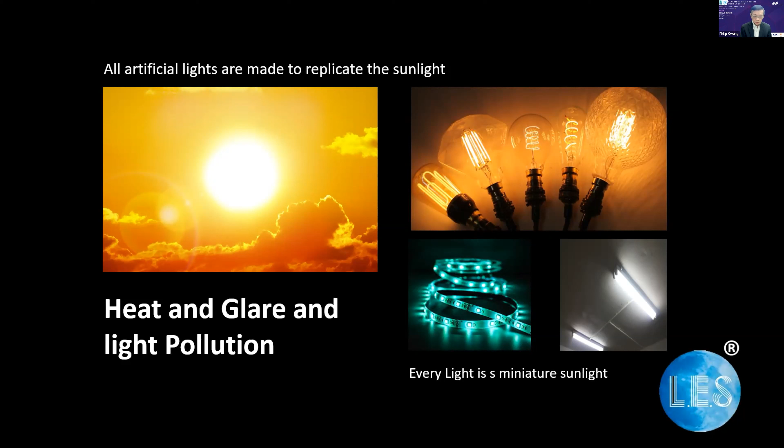We talk about it as a technology, and since we are using mostly artificial light produced according to the characteristic of the sun, why not have something produced according to the characteristic of the moon? This is the reason we founded LES, a light emitting surface. The surface is akin to the surface of the moon. We reflect light,

and we call our lighting technology the moon, representing our light. The heart of the technology is that moonlight doesn't produce heat or glare, because you can see moonlight from a further distance, and therefore it doesn't cause any light pollution. I'm saying this not because we think moonlight or LES will eventually replace LEDs, but we think that sunlight artificial lighting and moonlight artificial lighting could harmonize to build a better environment for ourselves.

LES is an award-winning technology. It was named the world's first printed lighting technology, and since then we have been internationally patented in China, Japan, Taiwan, Singapore, and of course Europe. The trademark has also been registered. On the day we launched LES, we had immediate recognition from Philippe Starck, the world's most renowned interior decorator, and with his blessing, we were able to put out LES as a pilot project in South Beach.

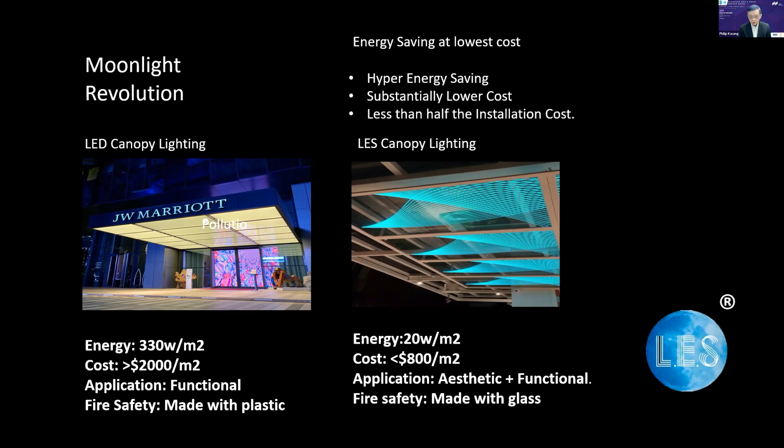Throwback to today, the same LES could be designed with high aesthetic. In fact, LES can be produced in all kinds of patterns, any pattern of your preference, so it can achieve the aesthetic typically associated with high architectural value. In terms of fire safety, more and more LEDs are being used, but more and more LEDs are plastic, and plastic is typically not well accepted by our fire authority. Whereas LES is fully encapsulated between two pieces of glass, which immediately places a lot of confidence in terms of fire safety.

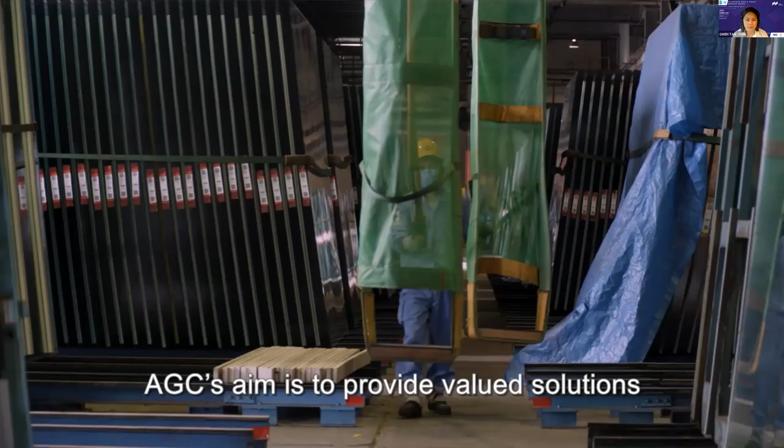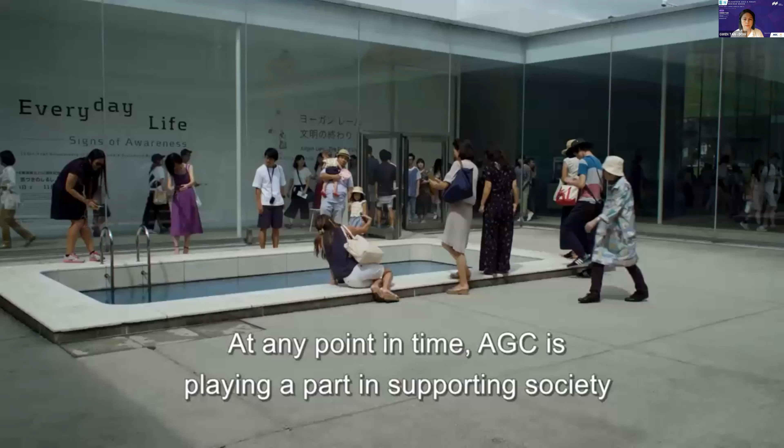AGC constantly strives to provide customers with high-value solutions and functional products. We offer a wide range of materials such as glass, chemicals, electronics, and ceramics, and have a strong presence in many countries around the world. AGC's aim is to provide valued solutions in high-quality materials to people around the world. Our fluoropolymer resins for coatings are used in many places around the world. Our fluorine film is used in Allianz Arena in Munich, Germany, and in many stadiums and architectural constructions worldwide. AGC's display glass is used in smartphones around the world; our glass plays an essential role in presenting clear images. At any point in time, AGC is playing a part in supporting society somewhere in the world through the provision of unique materials and solutions.

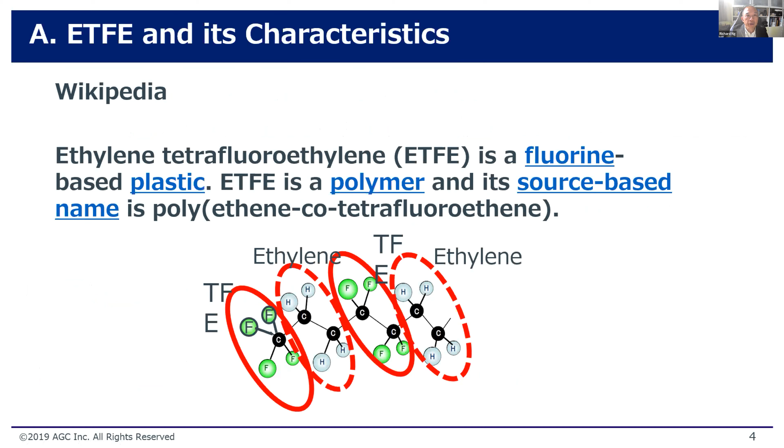This is something I lifted from Wikipedia in case anyone is interested in the scientific description of ETFE. It's just ethylene tetrafluoroethylene, and like what the earlier video demonstrated, it is a fluorine-based plastic, very well developed and researched by AGC.

I will share a video. This is lifted from YouTube. It is a fantastic source material for ETFE. This is one of the many videos that I found that perfectly describes and depicts what ETFE can do and the advantages of which.

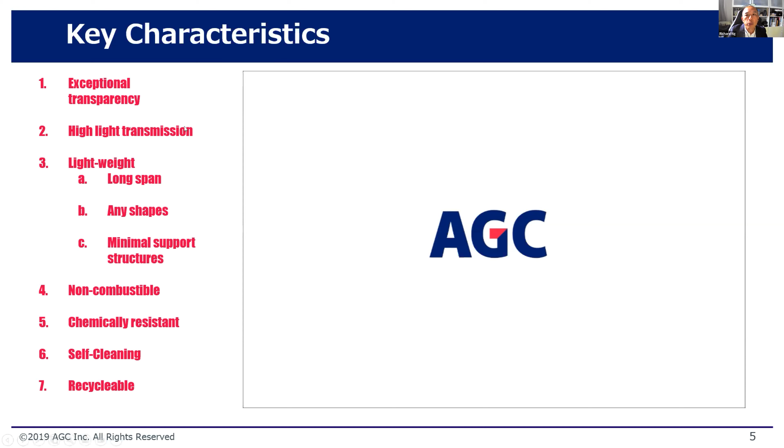That's 7. You can also introduce solar shading on ETFE. So if you have a specific U or G value that you want to achieve, that can be customized with the use of prints.

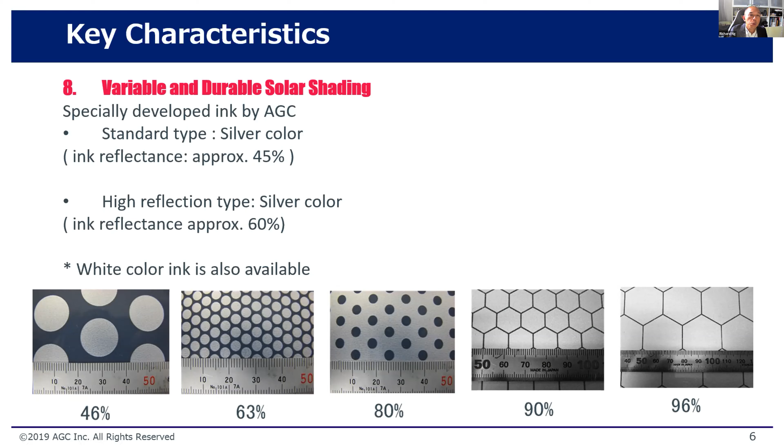This is unique and very important research that AGC has undertaken, and they have moved on since 2013 to ensure that the reflectance of solar or UV improves with every new development that they have done.

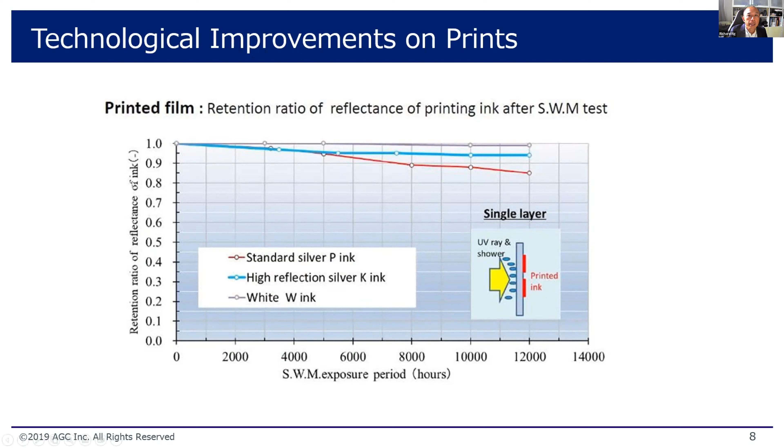Number 9, another characteristic is the superior weatherability. The product was first used, I think, about 35 years ago - I apologize, the number here says 27 years, it should be amended to 35 years already. So the optical properties and mechanical properties, by and large, stay about the same. It's a highly durable product.

And also the R&D undertaken by AGC is to improve on its haze and clarity. That is something under R&D right now. Probably by end of the year, as I was told, this product will contain low haze and high clarity to a very large extent when they push out the product.

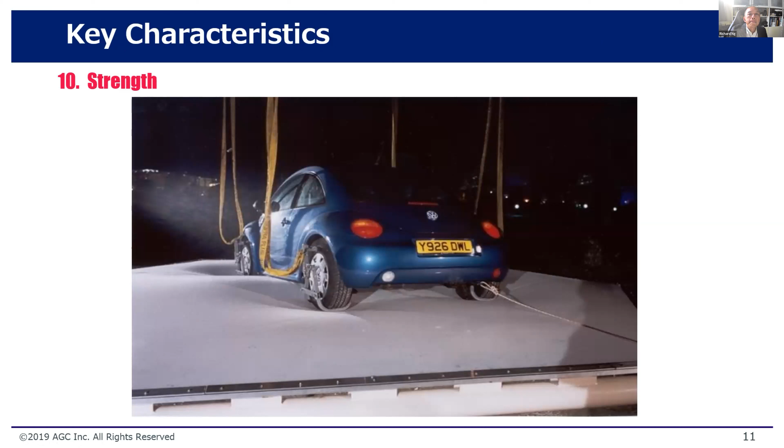And finally, one of the key characteristics is the strength of the ETFE. It can take on the weight of a car in its form.

So, critical considerations in ETFE application: importantly, other than making sure that the loads are properly taken into account, you also want to think about the seismic loads, the surrounding buildings, and others. Glass has been a dominant product for roofing and facade since it was invented, but with it comes various disadvantages.

For example, in volcanic regions or where there's high earthquake activity, typically when buildings collapse, there'll be a lot of debris. So in the use of ETFE, you're talking about relatively less steel structures compared to using glass, and you don't have glass shattering, unlike glass itself.

Also for surrounding buildings, if you're using glass as a roof for commercial complexes, anything that falls from the sky, be it steel pipes or heavy objects, immediately breaks the glass roof below. With ETFE, you just puncture through the plastic without causing any shattering. And finally, fire safety, chemical spills, and maintenance are other reasons to consider ETFE instead of traditional glass.

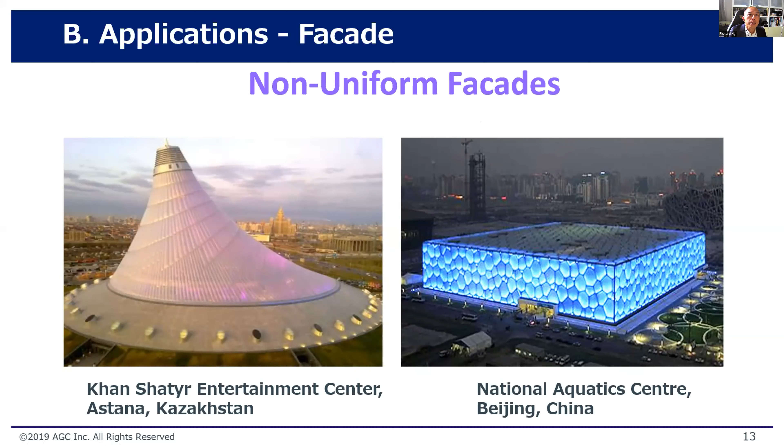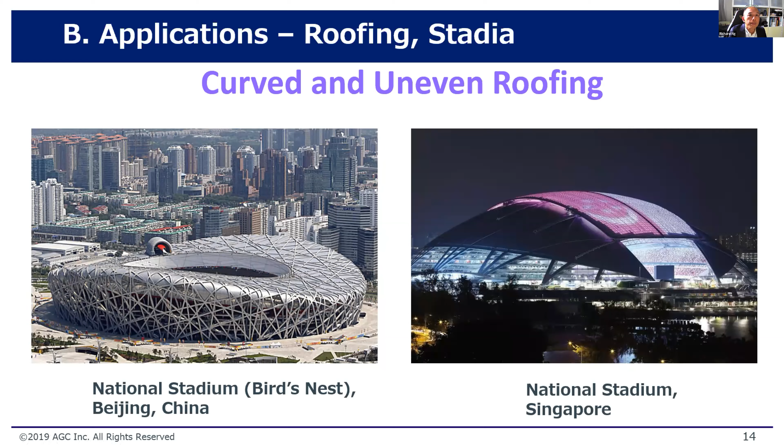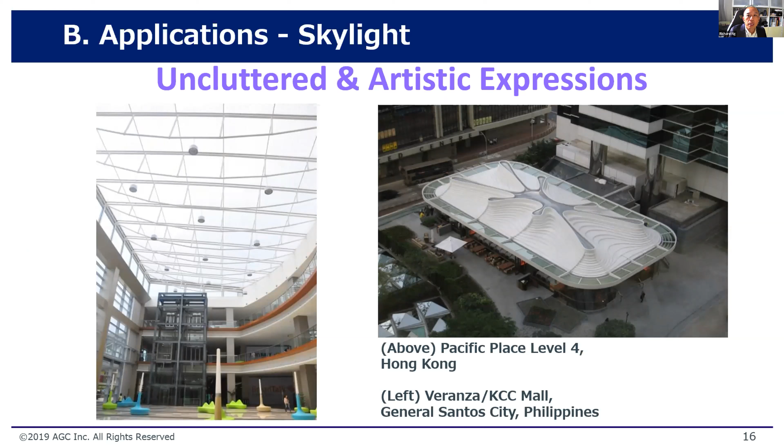Skylight, use of ETFE in skylights. This is in a Philippines mall. The one on the right is in Hong Kong for artistic expressions.

And the use of LED with ETFE gives you a completely different look at night with the use of lights. In fact, you can probably incorporate this - AGC can probably work with Philips in making sure that LEDs can also be incorporated into this product.

Thank you. So I'll move on to the two types of ETFE installation available in the market. One is the single layer tension system.

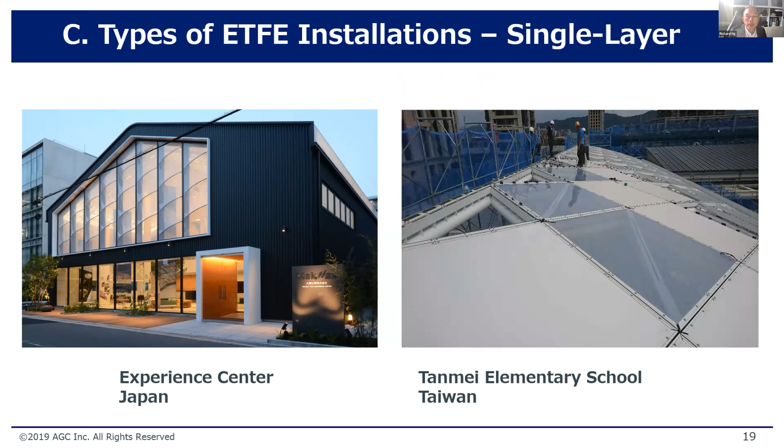This is a project in Japan - you'll notice on the roof those are entirely single layer ETFE. Facade using single layer as well on the left, and also for a school as a canopy on the right, which is a combination of transparent ETFE and opaque PTFE.

And the second type of ETFE installation is the cushion system - essentially two pieces of ETFE inflated with air in between. So the entire system will consist of an air pump or air inflation unit.

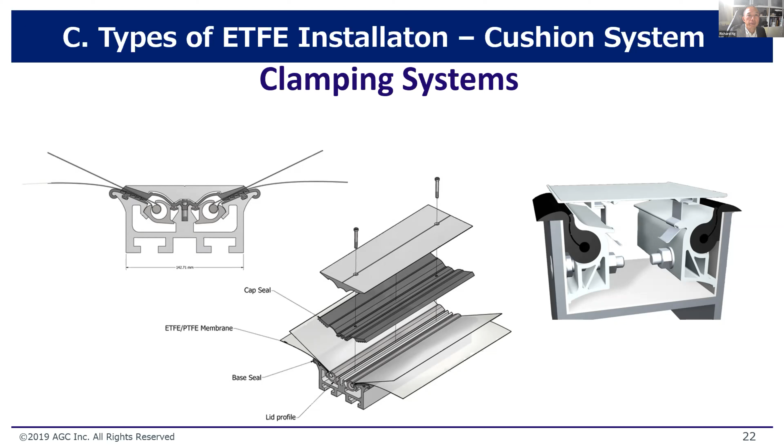Increasingly, you will notice that ETFE has been considered the go-to product, particularly for roofing, simply because of the nature of the product and how flexible it can be in offering architects and designers flexibility and non-restriction as far as imagination can go.

So I think that is fundamentally, or rather essentially, the end of my presentation. I hope I kept within the time.

Yes, you did, Richard. Thank you for the sharing. I love especially all the project references—they all look so fantastic and aesthetically very nice. So Richard, we do have a question from our participants.

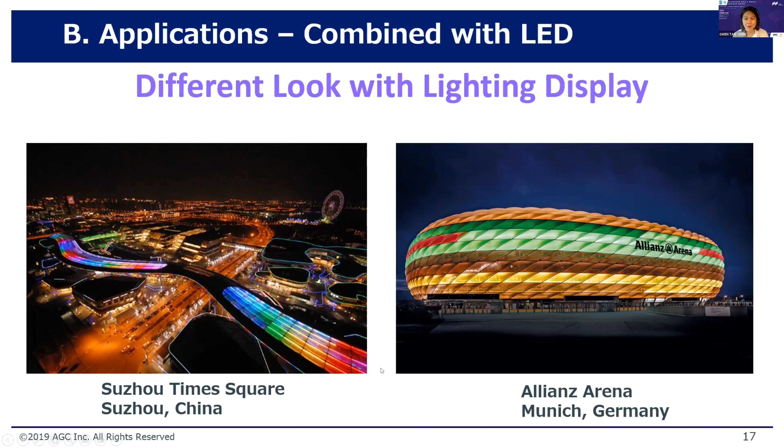Okay, thank you Richard, that's a very nice presentation. Do we have any more questions on the floor? Let me just check again... Yeah, I think that's the only question that we have. But we do encourage participants to keep putting more questions in the chat box, because we have another Q&A session towards the end. For now, let's move on to the next session.

Next up, let's hear from Lina Lu from RSP Singapore and Vance from Arup Singapore. A quick introduction: Lina has more than 30 years of architectural project experience, and her portfolio ranges from residential, education, infrastructure, sports and recreation, hospitality, offices, and retail projects. Vance is an associate with Arup Singapore Private Limited, and has a deep understanding of design, production, and site challenges from his early days of industry experience. Now let me pass the time to both Lina and Vance to discuss the topic of CapitaSpring: challenges in high-rise facade design.

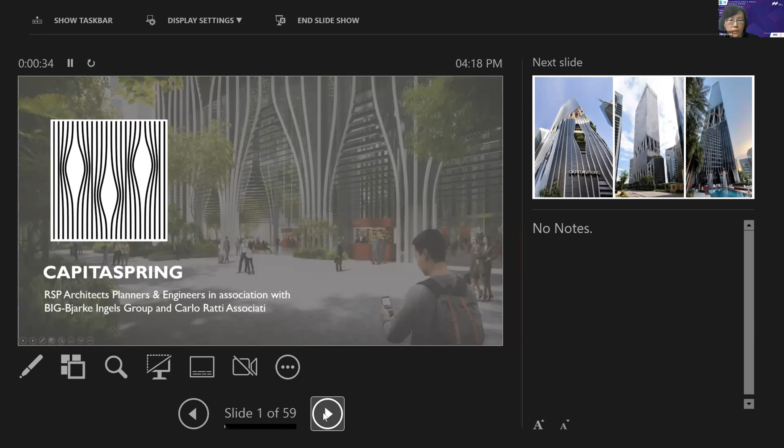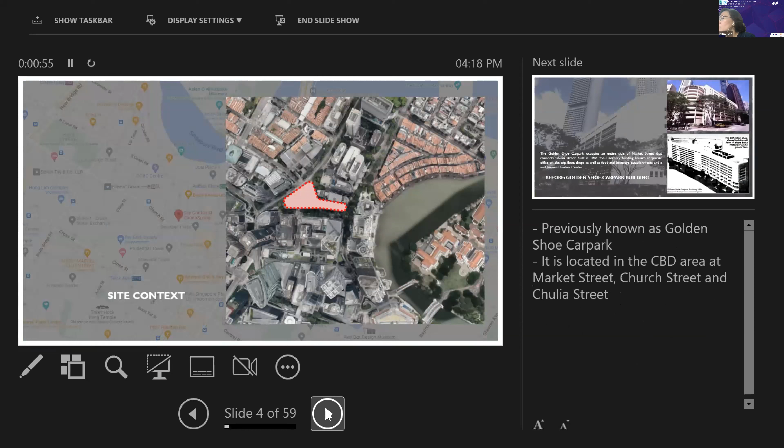So CapitaSpring is designed by BIG in association with Carlo Ratti. BIG is a company based in Copenhagen and New York. As you can see, this is a newly completed office tower in the Singapore CBD area, located within easy walking distance of Raffles Place MRT and Telok Ayer MRT, and near the Singapore River. The site is very close to the heart of the Raffles Place MRT area.

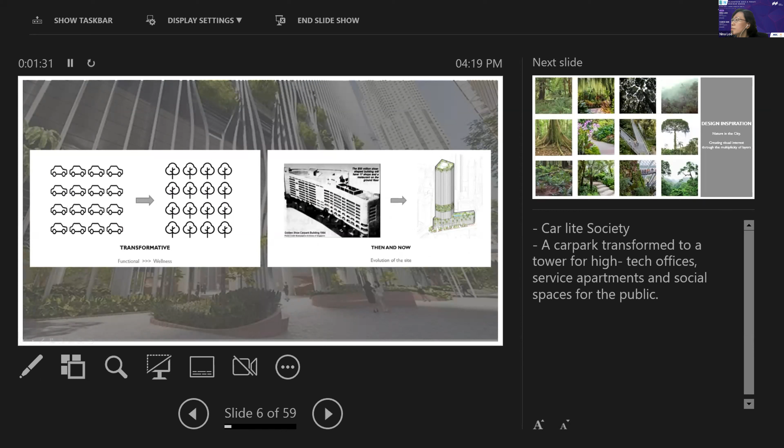In the existing location there used to be a 10-story office building, a car park building called the Golden Shoe Car Park Building. At that time, this building was used to park your cars if you were visiting the Raffles Place area. What we have done is transform a car park building into a building for wellness, for functional use. As you can see, there's an evolution of the site on the right, from the car park building to a modern-day office building which is biophilic in nature.

The design inspiration from BIG: he takes inspiration from nature in the city and creates visual interest through the multiplicity of layers. As you can see, within the entire tower block, they have interspersed nature at ground level, at mid-level, at top level, and even at the roof level.

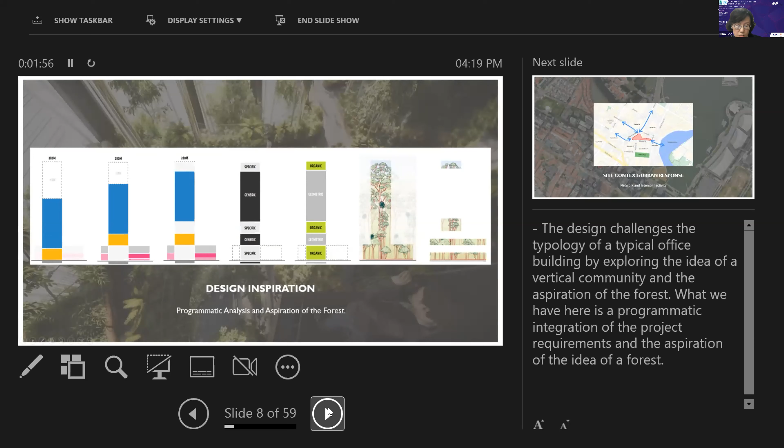This is an example of the urban context. We have a view towards the Singapore River, towards Cecil Street, Telok Ayer Street, and Pickering Street. And as you can see at the bottom, we have Raffles Place.

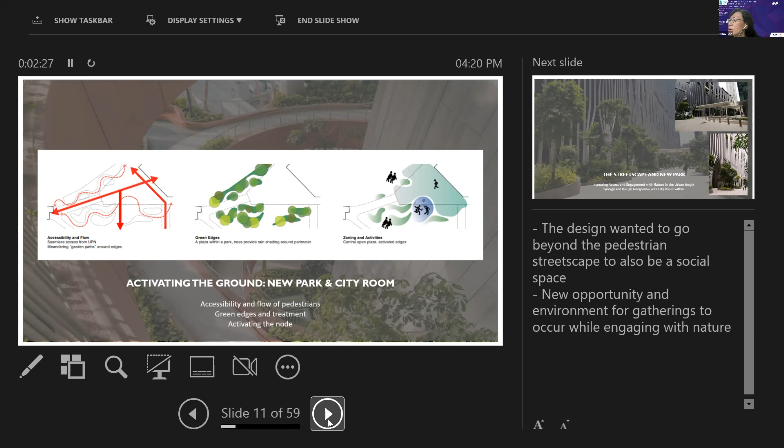At one corner of the site, the ground floor area is given to a public space, which we call the city room. This facilitates the commuter flow and the pedestrian flow in the area. This city room is a new ground activation place and it connects with the new park area. We also have new linkways which will connect you and shelter you all the way to Raffles Place through the next door building to Raffles Place MRT.

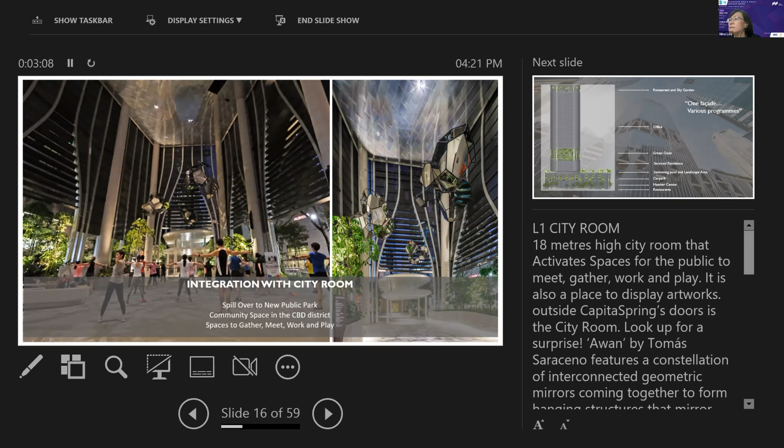So there's increasing access and engagement with nature, and we have actually reintroduced nature within this area. A portion of the market street is closed off and it becomes a public park, integrating with the city room at ground level. So at the city room, this is a public communal space where there are activities sometimes happening, sometimes Christmas celebrations, and there is a public artwork kindly sponsored by the developer, which hangs over this city room area.

Now regarding the facade element, as you can see, this is a 51-story office building. At the rooftop, we have a restaurant and a sky garden. We have an office component. In between the office and the service apartment, we have a green oasis. We have swimming pool and landscape area, car parks, hawker center, and restaurants. So what BIG has done for the design is integrate all the programs within one design into a uniform whole so that it looks like a unified biophilic tower without any breaking of it into different forms and different formats.

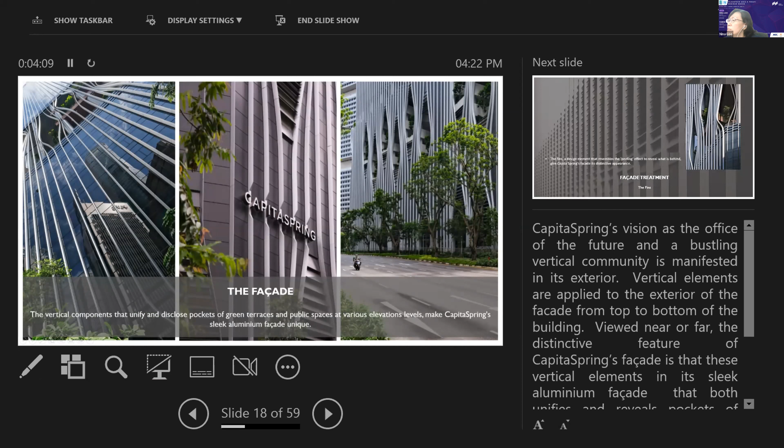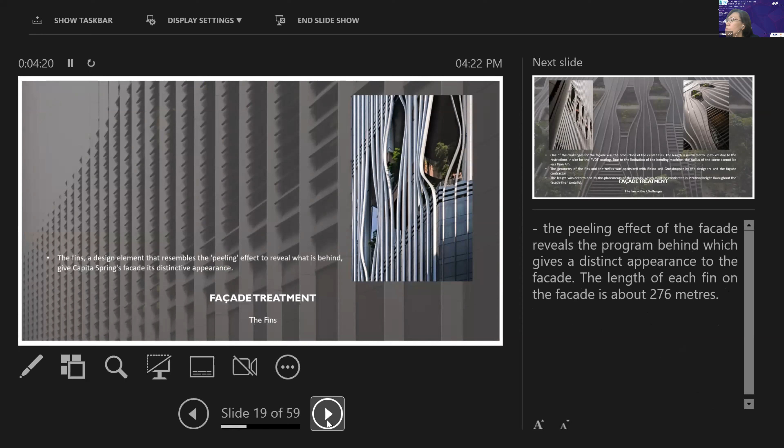So we go on to the facade. We have a vertical element, which is like the fin. This vertical element runs throughout the entire building and it opens up into pockets where you can actually look into the green terraces within or the public spaces. This is an example of the peeling effect where the building actually peels back and reveals what is hidden within, and this is what gives the CapitaSpring facade its distinctive appearance.

Now, one of the challenges of the facade was the production of the very long curved fins. The length is restricted to up to 7 meters due to the restriction in size for the PVDF coating. Also, due to the limitation of the bending machine, the radius of a curve cannot be less than 4 meters. So all this geometry was worked through together with BIG, together with the curtain wall specialists, and also with Arab Facade, and it was optimized by use of various programs like Rhino and Grasshopper.

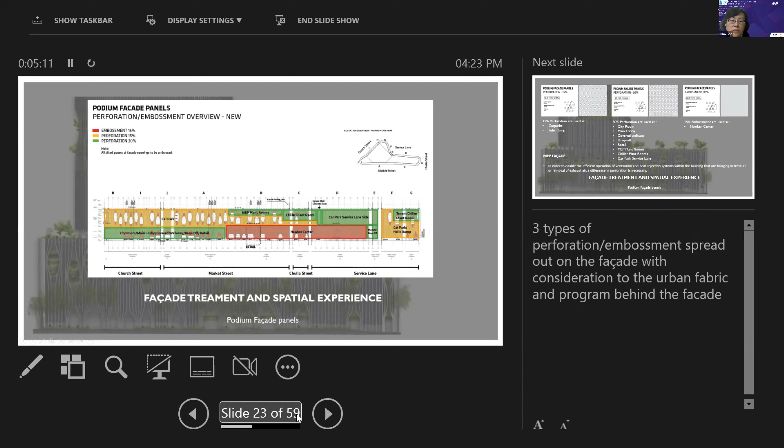This is an example of the facade at the podium level, where there are embossed panels, perforated panels with different percentages. The different percentages are used where they are required at different areas, especially at the M&E rooms where the perforation is much more. Also for the use of glass, it was studied in conjunction with the facade consultant, and the types of glass used were in relation to the usage, like the office area and the podium area. A gray color glass was chosen, but the thickness and type of glass was taken into consideration.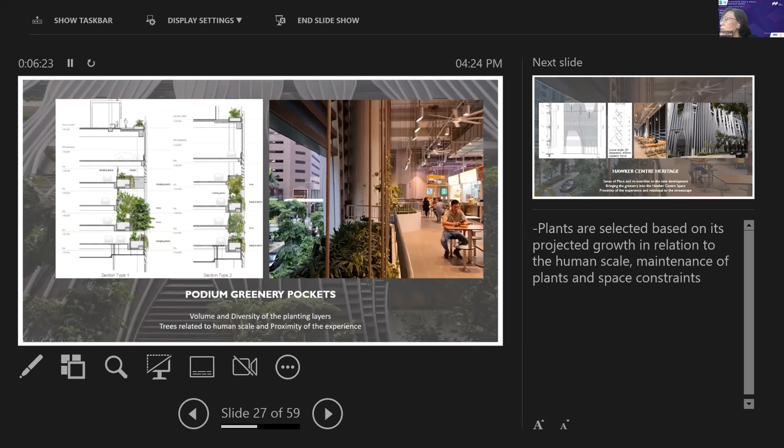What are the spaces behind these areas? For the podium level, the facade peels open to reveal pockets of greenery, which serves as an interesting facade element, and the trees relate to the human scale. You can see that even from the hawker center - those of you familiar with Singapore know that this previous site had a kind of iconic golden shoe hawker center, which supplies food at economic prices to the CBD workers in this area. So the hawker center has been relocated back to the second and third story of this building. And as you have a meal, you can enjoy the pockets of greenery through the openings in the facade.

So for the hawker center areas, the facade actually consists of louvers, which are tilted at different angles, and this will allow for light and ventilation into the building.

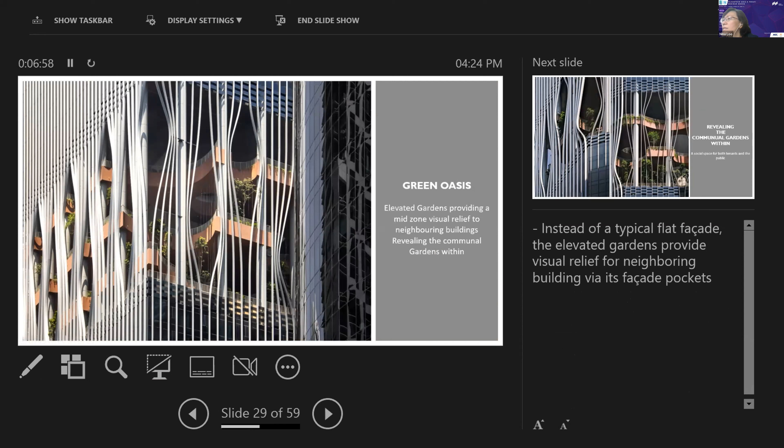For the next zone, which is called the Green Oasis, these are elevated gardens which are open to the public, and it provides a mid-zone visual relief to the neighboring buildings. These communal gardens also act as a social space for both the tenants and the public, so you're free to take a stroll in this area.

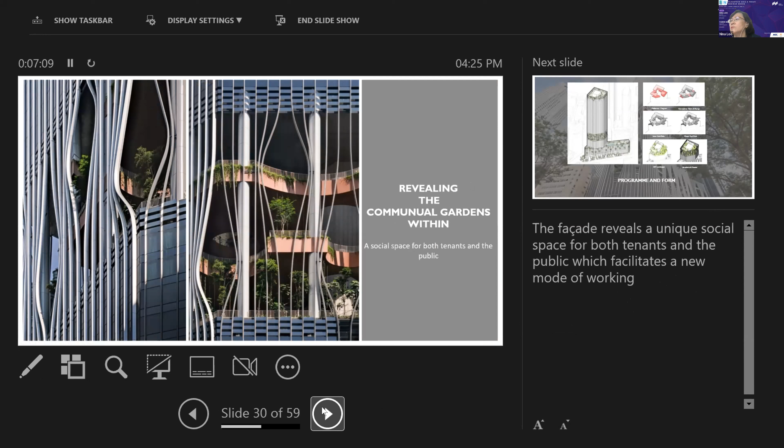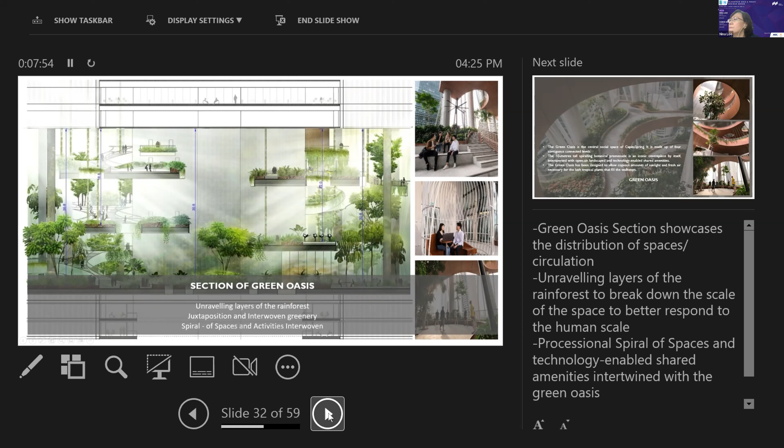So this is another view of the green oasis.

As you can see, it's largely vegetated with tropical plants and also with exercise equipment, so you can go for a quick stroll after work and exercise there if you want to.

The fins and the pockets also frame the view outwards, so you can actually see the previous Parliament building, Raffles City, the Padang, and the Singapore River from this area. It forms a beautiful backdrop.

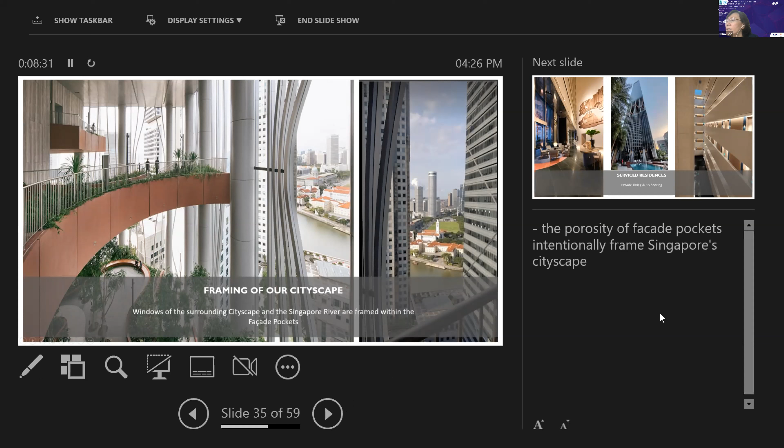We also have the serviced residences, at the mid-zone of the building, offering private living and co-living spaces. And the next block, we have office floors from level 21 to 49. This is a typical office lift lobby with column-free floor plates and very high floor efficiency.

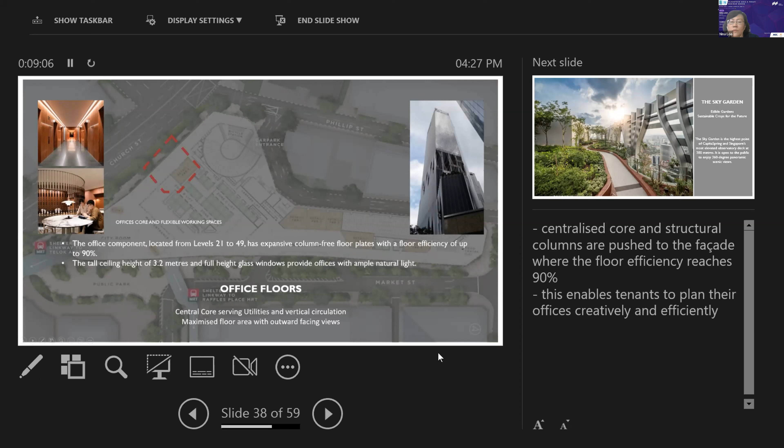For these office areas, as you can see from the tower facade, we have full height glass windows, providing the offices with ample natural light.

The Sky Garden, right at the rooftop of the building, is also open to the public during certain times. The client has done, together with the restaurant area, the edible gardens. So the edible gardens and the Sky Terrace — this area is the highest point.

This is Singapore's most elevated observatory deck at 280 meters. It is open to the public, and you can go up to enjoy 360-degree panoramic scenic views and take photos of the Singapore skyline from here.

There is also the urban farming aspect where they have a farm-to-table concept. There's a liaison relationship with the restaurant where some of the vegetables grown up here are served in the restaurants.

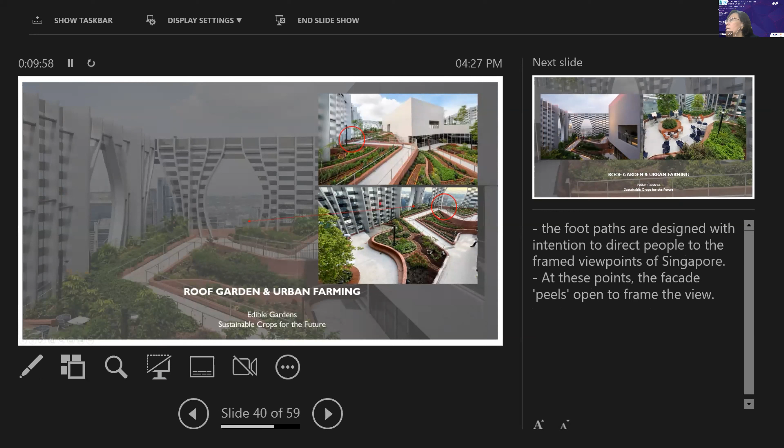Okay, this is an example of a roof garden.

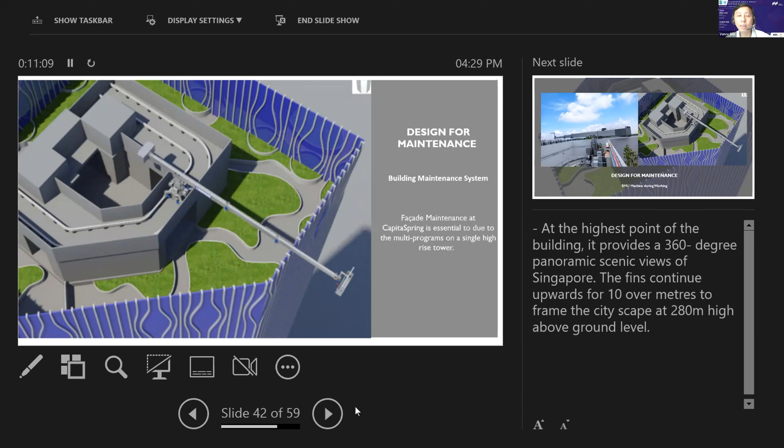In the early stages, with RSP, we dedicated a space on top of the roof core to have the BMU parked there, deployed out to maintain the facade with a glass replacement unit capability on top. This is for future glass maintenance, glass replacement should a glass break spontaneously, or if there are issues with the glass, and also for the purpose of inspection.

So as you can see, the BMU, or building maintenance unit, is located at the rooftop at the core to clean the facade. It can be retracted when not in use, and it can be concealed from view for people standing at street level within the service core.

Why is this so? Because it is an authority and client requirement that the BMU should always be concealed when it's not in operation.

This slide shows a picture of the BMU actually deploying over the parapet wall of the core wall to maintain the facade.

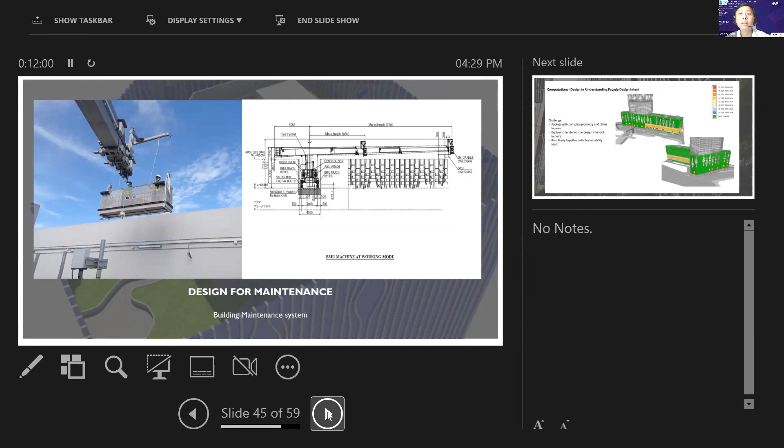The next topic I want to discuss is computational design, understanding facade design intent. So the original concept from BIG — we have louvers on the podium with fins. These louvers are meant not just for aesthetics, but also for ventilation, thermal comfort, and daylight purposes. During the design, we have a lot of pockets with complex geometry and tilting louvers.

The top right corner shows the different types of tilting of the louvers, from 80 degrees all the way to the flat ones. The flat ones are the green ones.

So how do we explain to the contractors or tenderers, when they are bidding for the job, the design intent of the louvers? It's not productive and not possible to show the different locations and different types of rotation on 2D drawings.

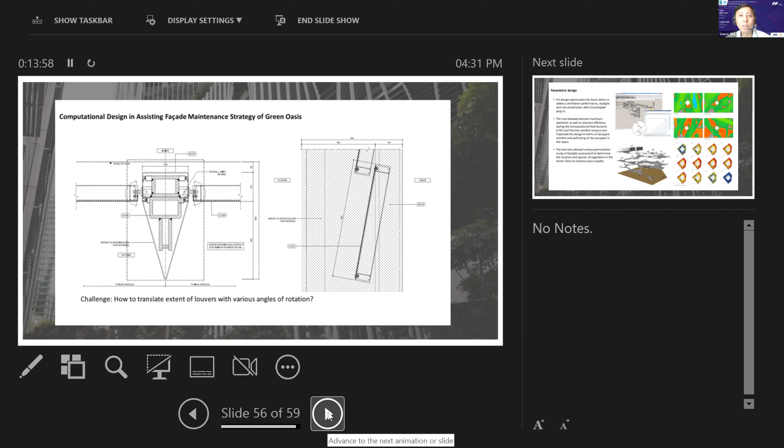So what do we do then? We use Rhino and Grasshopper software to identify where all these different tilting louvers are, and then show them on an elevation markup, like what you see just now. This allows the tenderers and contractors to understand them better and price it more accurately, as well as develop the shop drawing as per the intent once on board.

The beauty of the parametric design or the 3D is during the design development, we can carry out design optimization for the food center to address ventilation performance, daylight, and rain penetration using the Grasshopper plugins. The diagram on the top left shows screenshots of how we control the model to show the different rotation of the louvers, and on the top right is the daylight coming in through the podium facade.

This reduces our man-hour operation and improves efficiency during the CFD studies and thermal comfort analysis, and also improves the design in terms of occupant comfort and well-being. The bottom right-hand corner shows the different conditions when daylight comes in and when the user stands next to the facade, whether it's too hot or too cool, and whether there's adequate daylight.

The tool also allowed various permutation studies of the daylight assessment to determine the location and species of vegetation in the green oasis to improve space quality. The image on the bottom left shows different locations of trees in relation to the pockets on the green spring where it opens up, so we can study whether there's adequate daylight for the vegetation to enjoy.

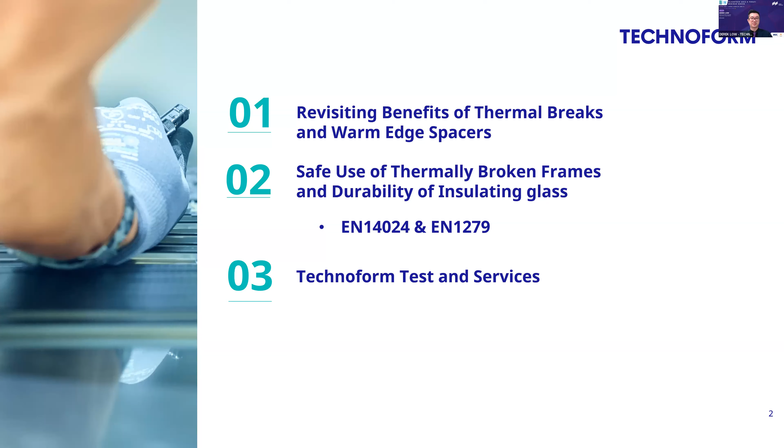Without further ado, let us revisit the benefits of using thermal breaks as well as warm edge spacers.

Aluminium is widely used for windows, doors, and facades for its good mechanical strength. However, aluminium is also a highly conductive material with a thermal conductivity of 160 watts per meter Kelvin, which is 160 times higher than glass. With exposure to the outdoor environment and solar irradiance, heat is absorbed and transmitted through conduction, convection, and radiation into the indoor air-conditioned environment. Due to thermal bridging, substantial heat is gained through the frame, causing the indoor frame temperature to rise above 50 degrees Celsius at times.

With heat transmitting through the frames as well as the edge of the glass, there will be additional unwanted heat transfer through the frames and the edge of the glass. This will result in inefficiency of air conditioning, as more energy is needed to remove the heat. In addition, building occupants will experience thermal discomfort as heat from the frames is emitted indoors. So how do we reduce heat gain through the frames and the edge of the glass?

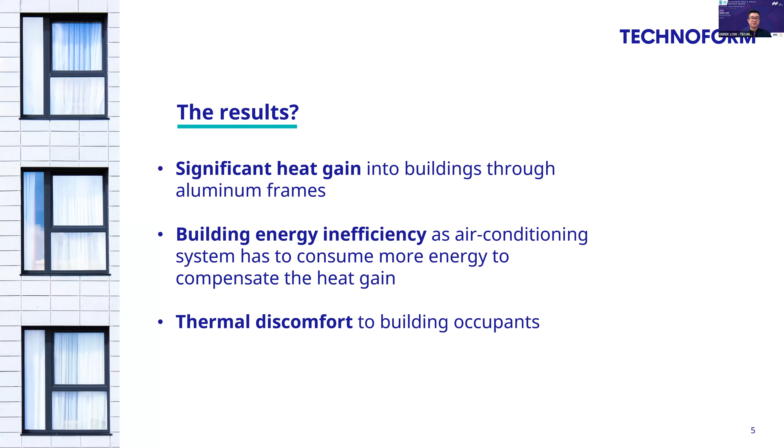We can consider inserting a low conductive material between the aluminium profile to create a thermal debridging. Technoform thermal break is made out of glass fiber reinforced PA66, an engineering plastic with a thermal conductivity of 0.3 watts per meter Kelvin, which is approximately 533 times lower than aluminium. This effectively creates a thermal debridging, substantially reducing heat gain through the fenestration frame and ensuring better indoor thermal comfort.

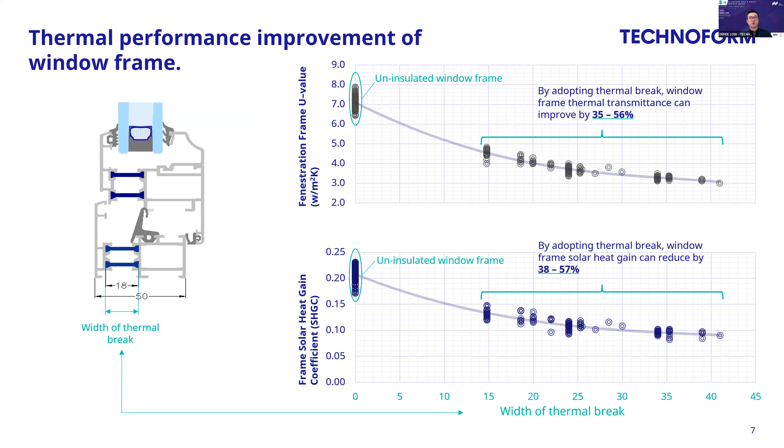With a thermal break as small as 15 mm, we are able to improve thermal transmittance by 35%, and as SHGC has a direct correlation to thermal transmittance, we see a similar quantum of 38% decrease in solar heat gain.

Looking at curtain wall frame performance, similarly by adopting a thermal break width as short as 15 mm, you are able to reduce the U value by as much as 81% and the SHGC value by as much as 79%. We see a larger improvement for curtain wall systems because generally uninsulated curtain wall frames have much poorer performance due to their large depth. Therefore, from the improvements seen in both window and curtain wall systems, a thermally broken system should be considered when trying to improve the frames.

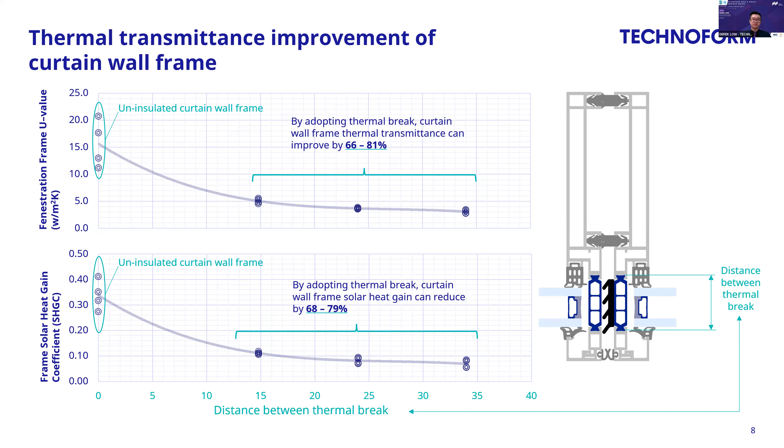Here are some project references where Technoform solutions are being used. Apple showrooms as well as their campus commonly use jumbo size IGUs that are about 3 by 14 meters. In Apple Campus 2 in North America, they adopted Technoform's warm edge spacers to ensure the IGUs are able to withstand the wind loading as well as having great thermal performance.

CITIC Tower in Beijing, the tallest building in Beijing with triple glazing curtain wall, has decided to use Technoform's thermal break in the system as well as warm spacer to assist them in obtaining LEED Gold certification.

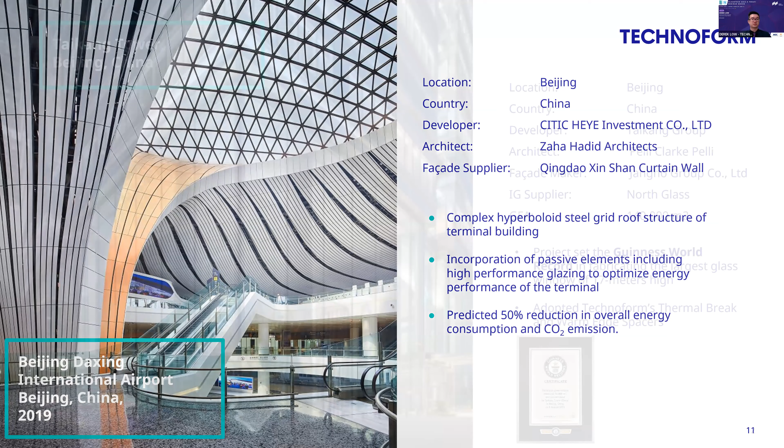Lastly, the current holder of the Guinness World Record for the largest glass window with a height of 70 meters, Taikang Tower in Beijing, also adopted Technoform's thermal break and warm edge spacer.

Closer to home, Port of Singapore Authority has selected Technoform's solution from the Super Low Energy Building SLEB Smart Hub, which is a database proven to assist in obtaining super low energy. The maintenance base is the first major building to be completed in the area with a super low energy rating.

As shown from the project references, it is noted that facades are getting taller and more complex. Glass is actually getting larger and heavier. Hence, there is a need to ensure that the facade profiles are sustainable and the glass is durable.

Before I move into how to ensure the safe use of thermally broken frames and durable IGUs, let us first look at some of the reasons why there is a need to ensure safe use of thermally broken frames as well as durable IGUs.

As buildings get taller year on year, building facades are exposed to more environmental loads like wind as well as temperature change. When the frames are exposed to wind loads as well as temperature change, the frames as well as the windows will go through behavioral changes like bending as well as shearing.

Traditional non-thermally broken frames are able to directly transfer the load from the external to the internal structure with ease, as the entire profile is made out of aluminium.

However, with the introduction of thermal breaks, the aluminium profiles of the facades are now a hybrid of two materials, aluminium as well as engineered plastic. Therefore, there is a need to ensure that the assembled profile is still able to perform mechanically similarly to a non-thermally broken frame.

Glass might not contribute significantly to the safety of the building facade, but durability of the insulating glass is equally important, as failure of insulating glass will mean that it will no longer serve the intended design use and lifespan.

For areas where day and night have large temperature differences, the cyclic change in temperature will result in the pumping effect of the insulating glass. With poor design consideration, this will result in gas leakage from the glass as well as moisture penetration into the glass.

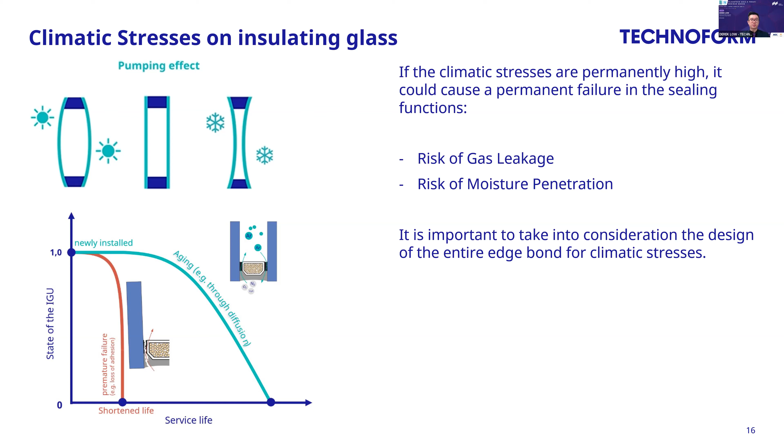As such, to ensure safe use of thermally broken systems and durability of glass, standards are put in place to ensure that industry manufacturers are able to follow and ensure that the end products are safe and durable.

There are many recognized standards globally, and today I'll be touching on EN 14024, which documents the tests and requirements for mechanical performance of metal profiles with thermal barriers, as well as EN 1279, which documents the tests and requirements for insulating glass units.

EN 14024 provides industry stakeholders and professionals the requirements as well as the tests to ensure that the design as well as the components selected are of quality and will be able to perform as intended.

Before we delve into the standard, it is good to note that manufacturing processes are also important in ensuring the safety and durability of the thermally broken frame.

Traditional frames are a complete profile, and when loading occurs, the profile will bend rigidly.

However, with the introduction of thermal break to the facade profiles, the profile will be required to be mechanically fastened. If the profile is loosely fastened, the profiles will bend at different rates.

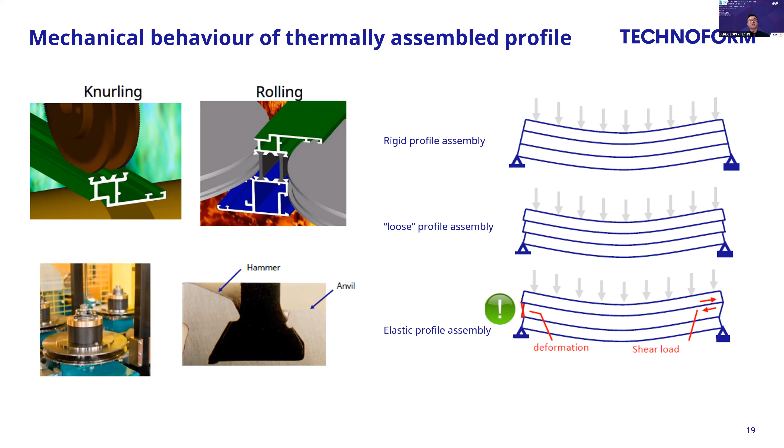However, with mechanical fastening, it will bend at a similar rate, but this will cause shear loading as well as the possibility of deformation. Hence, the assembly process plays a part in ensuring the assembled profile has shear strength strong enough to withstand the loading.

So in EN 14024, they focus on the tensile strength as well as the shear strength of the assembled profile, as the external facade is in constant exposure to wind and temperature loading. This will cause transverse as well as shear stress.

In addition, facades are supposedly designed to last a long time. Hence, there is a need to ensure that the assembled profile must be able to withstand the test of time. This is why there is a need for testing the elongation of the assembled profile, as well as the transverse strength after aging, which is simulated with 1000 hours.

Tensile strength has to meet the requirements at room temperature as assembled profiles need to be well designed and manufactured. This is because the profiles will be part of the facade system and will be there for the design lifespan. Hence, there will be a need to also ensure that the assembled profile is able to perform equally well after the initial installation.

The profiles are also placed through an aging process of 1,000 hours to simulate the building built for a long period of time. For climatic regions with different seasons, during summer the temperature of the frame will be heated to high temperature, while during winter the temperature might be reduced to possibly below 0 degrees. Therefore, the tests ensure that the assembled profiles perform as per design mechanically at temperatures of 80 degrees as well as -20 degrees.

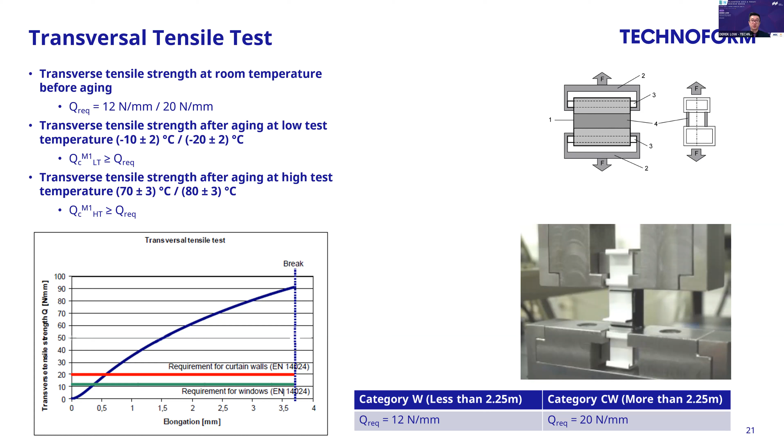As time passes with constant wind and temperature loading, it's also important to ensure minimal elongation from the assembled profile, as elongation is undesirable. Hence, a deformation aging test method under loading is done at 80 degrees for 1,000 hours to ensure that there is less than 1 mm in elongation.

Besides transverse stress acting on the facade system, longitudinal stress is also present due to the difference in temperature between the external and internal frame. As a thermally broken frame's advantage is to isolate the heat on one side of the frame, the heat trap might increase the temperature of the frame to as high as 80 degrees on one side of the profile, causing expansion which might lead to shearing.

Hence, there is a need for a test to ensure that the assembled profile is able to withstand the shearing effect. In EN 14024, loading is placed on two ends of the aluminium profile at a slow feed rate, and the measurement is actually recorded.

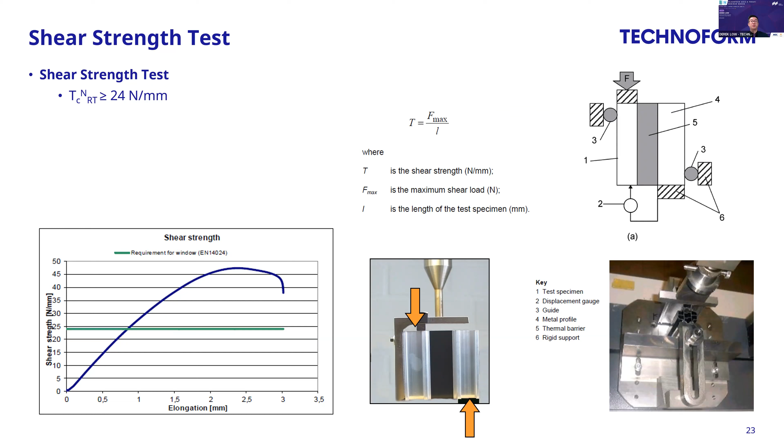After testing on different materials and combinations, PA66GF25 has been found to be the ideal choice for thermal breaks. This hybrid material is a combination of polyamide 66 with 25% glass fiber content acting as the strengthening agent.

Technoform not only uses long virgin glass fiber to ensure good mechanical properties, we also tap on decades-long knowledge and technology to weave the long chain of fibers into the polyamide, resulting in excellent strength that meets and goes beyond the global standards, like the deformation resistance shown in the previous slides.

Besides having strong elongation resistance, PA66GF25 is the ideal choice in terms of thermal expansion. As the frames are exposed to high heat conduction, there will be linear expansion occurring, which will cause tension between the thermal break and the aluminium profile. Therefore, a material is needed that has similar linear thermal expansion.

With aluminium's coefficient of 23 times 10 to the power of -6 per Kelvin, PA66GF25 is only 10% different, which means the variation in length during thermal expansion is similar between both materials, leading to less stress on the profile.

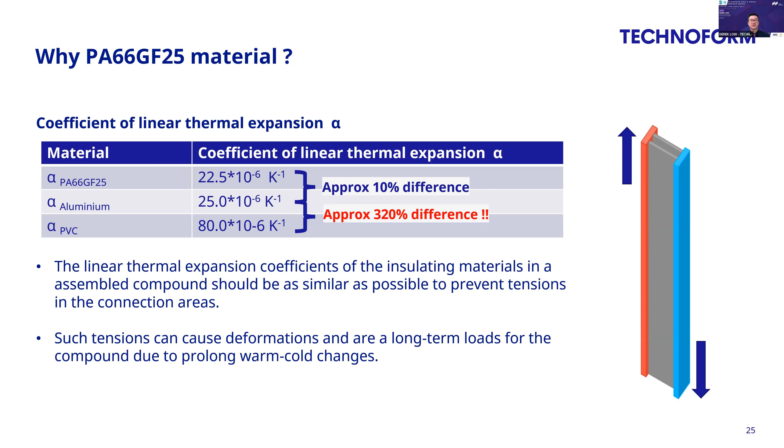In comparison to aluminium and PVC, the thermal coefficient difference is 320%, which is so much more than PA66GF25, and it will lead to extra stress on the facade system. Hence, choosing the right composite material for thermal break manufacturing is crucial in ensuring a safe facade system.

In the process of assembly, the proper execution of knurling, inserting, and rolling will ensure good shear strength for an assembled thermally broken aluminium profile. Here are some examples of poor execution of knurling and rolling process. By selecting inferior quality thermal break, cracks or even breakage might occur.

In Technoform, we go beyond by supporting our customers, advising them on the best practices in the assembly process so they are able to meet the performance requirements.

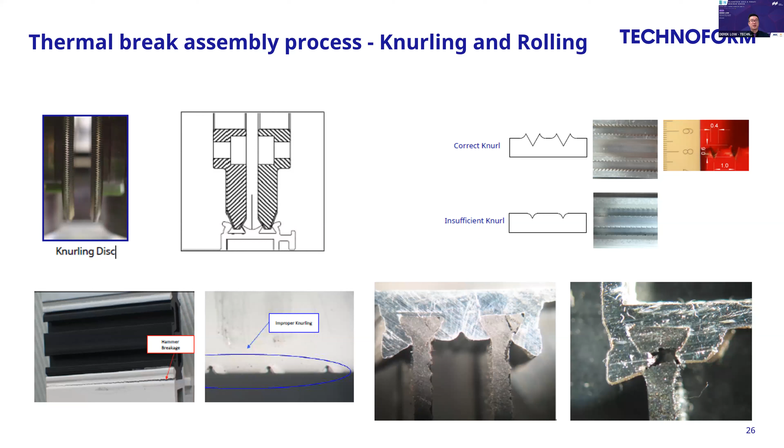For facade systems, which are the most exposed segment of the building, standards like EN 14024 are required to ensure that the facade is able to withstand the designed lifetime.

Hence, with the right raw material as well as the correct manufacturing process, this will allow an excellent assembled profile that meets the requirements of EN 14024, which will in turn ensure the safety of the facade system.

After discussing EN 14024, which ensures the safety of assembled aluminium profiles, let us now look at another standard, EN 1279, which covers the requirements for insulating glass units. As insulating glass takes up the majority of the window or facade system, we need some form of evaluation that ensures the parameters of the IGU, especially the safety portion, do not change significantly over time.

EN 1279 is made up of 6 documents, each talking about different tests and requirements for each component of the insulating glass. Today's topic focuses on durability of the insulating glass. We will talk in detail about the product standard EN 1279-5, which references the moisture penetration, gas leakage, and gas concentration test requirements in 1279-2, 3, and 4.

In EN 1279-2, they describe the test method for determination of moisture penetration index and specify the requirements for insulating glass units. The average moisture penetration index has to be less than or equal to 20%.

Moisture trapped in the IGU is something we are unable to control, especially since the manufacturing process is done in the open environment and in regions that are constantly humid. With excess moisture, this will lead to condensation happening within the glass. When the inner edge of the glass reaches dew point temperature, this means the IGU has already failed, as it is unable to prevent condensation from happening.

Checking the IGU to ensure there is no gas leakage is also important, as gas-filled IGUs increase thermal insulation. With gas leakage, the thermal insulation performance of the IGU will decrease.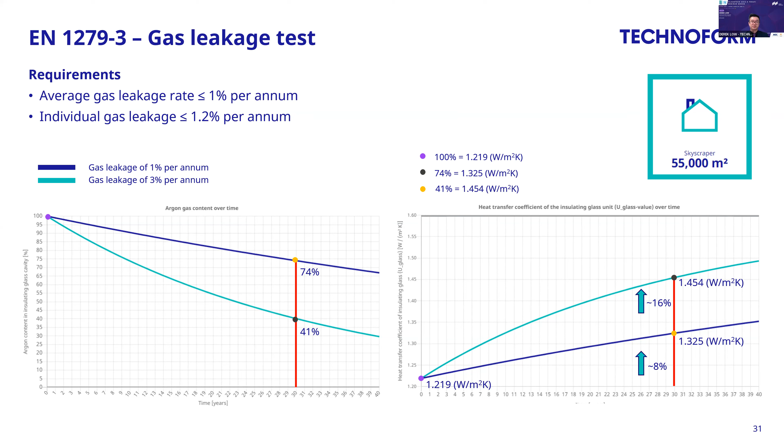For the gas leakage test, similarly to moisture penetration, the test also places the IGU in a fluctuating temperature to cause the pumping effect. This allows us to measure the amount of gas that leaks out after the test is completed. The 2 different types of tests in 1279 measure moisture penetration as well as gas leakage, which will reduce the durability of the insulating glass.

So how do we actually ensure that moisture penetration and gas leakage are kept to a minimum? The spacer, together with the primary sealant, provides the gas seal as well as moisture barrier to the IGU. Warm edge spacer not only provides excellent gas and moisture sealing, it also provides great thermal insulation properties at the edge of the glass as well.

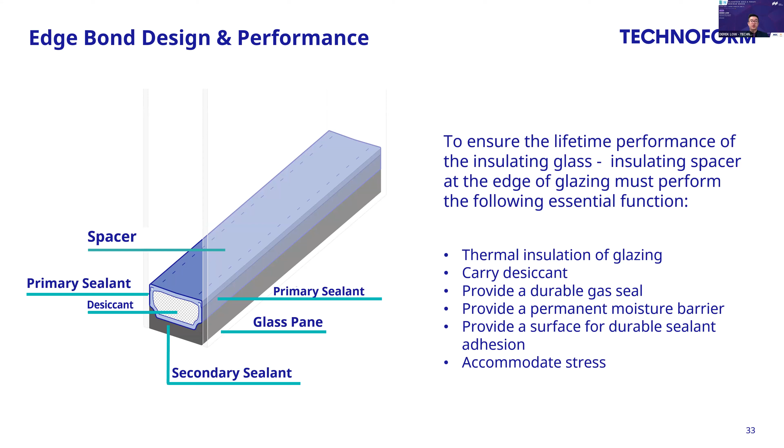To ensure that the sealants and barriers are good, EN 1279-4 Annex A talks about the requirements for having good glass-to-sealant adhesion.

In 1279 Annex A, the specimens are prepared with glass and sealant adhered together and placed under a tensile machine until separated. This is to ensure that under loading, there will be no loss of adhesion between the glass and the sealant, which would cause moisture penetration and gas leakage.

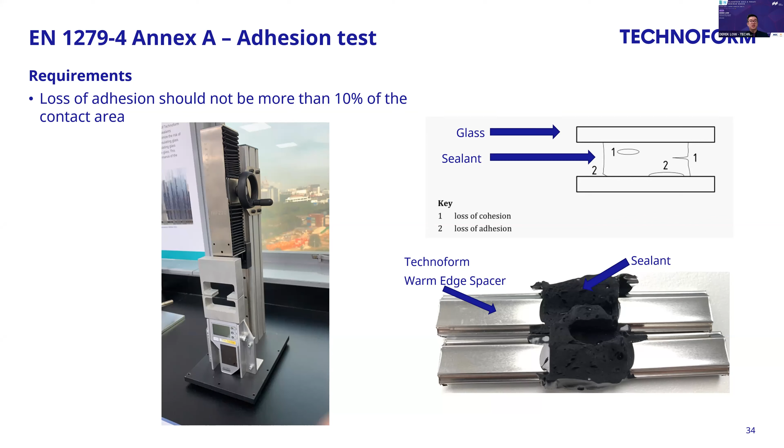As Annex A in 1279 only talks about the adhesivity between the glass and the sealant, we should not forget that there is a possibility of moisture penetration and gas leakage if the sealant is not well adhered to the spacers. Hence, in Technoform, we take a step further to modify the adhesion test and test on the quality of adhesion between the spacer and the sealants.

As mentioned in the earlier slides, we are moving towards the trend of having larger and clearer glass. This is why it's important to have durable and well-sealed insulating glass to not only prevent heat transfer through the edge of the glass, but also to prevent moisture penetration that damages the inner coating, mold growth, and gas leakage that would cause the insulating glass to not perform as per design. This is why EN 1279 helps us in the testing and manufacturing of good IGUs.

So today we covered standards that ensure the mechanical properties of assembled profiles with thermal barriers, which is EN 14024, as well as the standards that ensure the durability of insulating glass, which is EN 1279. There are also other standards across the globe that ensure safety and durability, like ASTM and AAMA standards, which I did not cover today. If you're unsure whether your thermally broken window system will pass EN 14024, or whether your IGU conforms to EN 1279, you can always approach us.

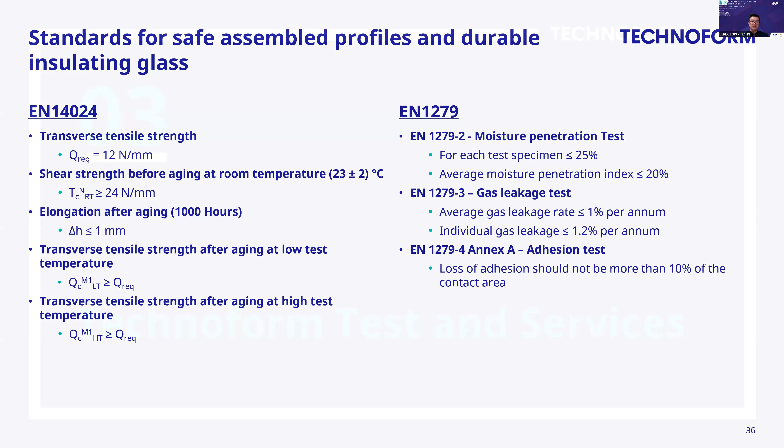Here in Technoform, beyond being a manufacturing company of thermal breaks and warm edge spacers, we also perform tests and services. With production plants distributed in 3 main areas, North America, Europe, and Asia, we are always near you in terms of supply. All our production plants and offices are ISO certified to ensure there is no difference in quality of services received in any part of the world.

In Technoform production plants, we understand that quality of product solution is paramount, as the solutions we provide will be part of the facade designed to last many years. Hence, we do rigorous tests starting from incoming raw material to outgoing finished goods. We also do some tests involving EN 14024 and EN 1279 at the production plants themselves to ensure we are providing solutions so our customers can have peace of mind and not worry whether the assembled aluminium profile or the IGU will pass actual standard verification.

In addition, the competence center in Germany, and the laboratory there, is well equipped and certified to do EN 14024 and EN 1279 tests. We also have 2 training academies that allow us to bring awareness to the benefits of adopting international standards.

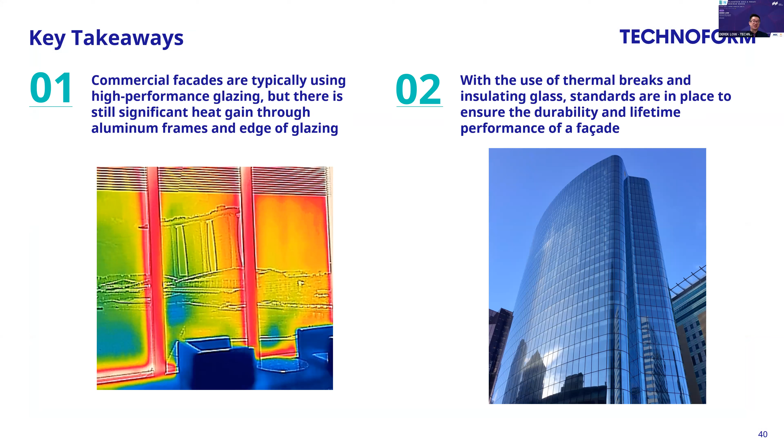A durable facade not only looks at the right selection of material, manufacturing processes are also vital in ensuring that the assembled aluminium profile conforms to EN 14024, which in turn ensures durability and lifetime performance.

Lastly, durability of the IGU is not only about the glazing. Technologies for edge bond are also critical in ensuring durability in the IGU, like minimizing gas leakage and moisture penetration. This durability can be ensured by selecting proven technology and materials which conform to EN 1279 standards, like a good sealant and spacer to ensure good adhesion for both the primary and secondary seal, which is crucial.